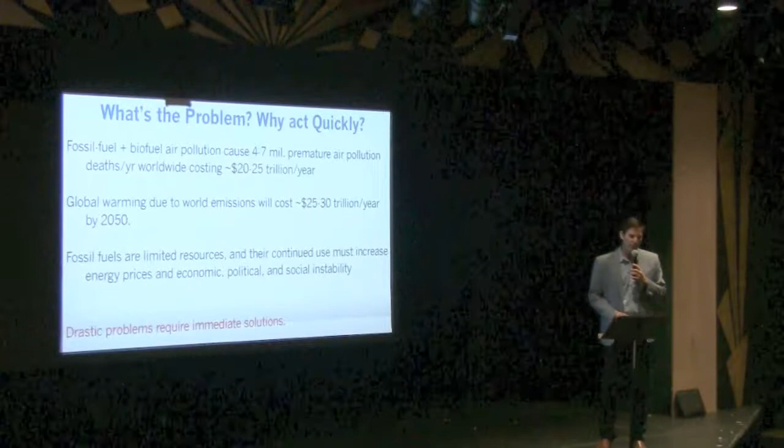In the U.S., it's about 65,000 premature deaths, and in California, around 13,000 premature deaths per year. So this is a significant problem that occurs today, and we'd like to eliminate it.

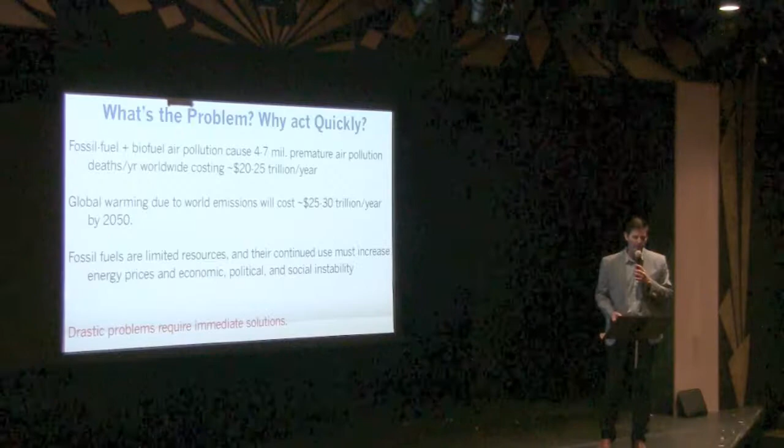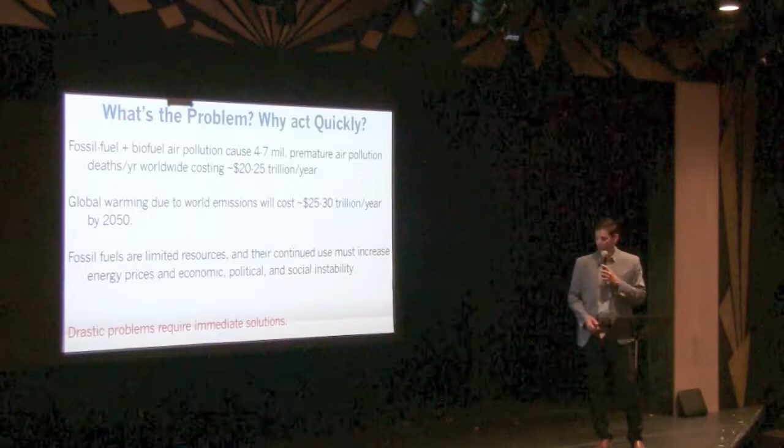Global warming, of course, I don't have to convince you about either, and it's expected to cost $25 to $30 trillion per year by 2050. But fossil fuels are also limited resources, and even if you didn't care about climate or the environment, you'd still care about the fact that costs are going to go up with limited resources that decline over time, and eventually that can lead to social, political, and economic instability. So these are all drastic problems that require immediate and drastic solutions.

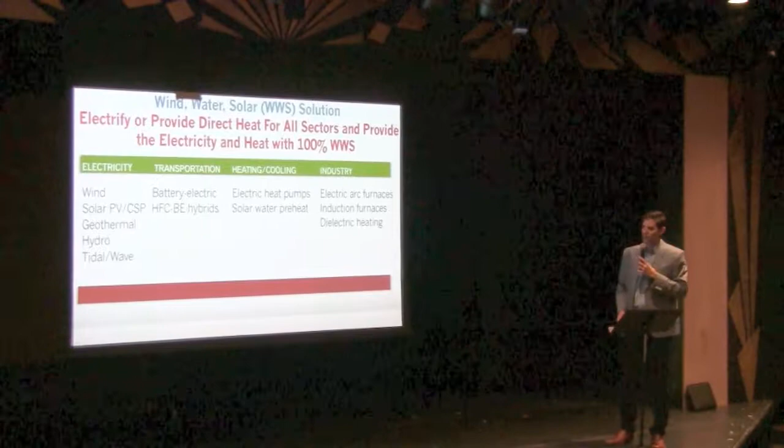Our solution has been to electrify or provide direct heat for everything, in all energy sectors, not just electricity, and provide that heat or electricity with clean renewable energy, namely wind, water, and solar power. For example, in transportation, we transition everything to battery electric vehicles, or for long distances, hydrogen fuel cell battery electric hybrids. I'll show you examples of that.

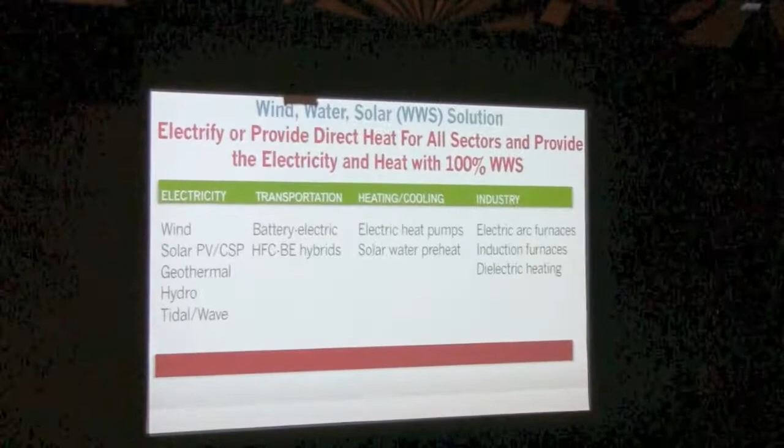For heating and cooling, we use heat pumps for pretty much everything, which run on electricity. They don't create heat, they move heat, and they also move cold, which makes them much more efficient. Some solar hot water preheating is also used. For industry, we use existing technologies like electric arc furnaces, dielectric heaters, and induction furnaces.

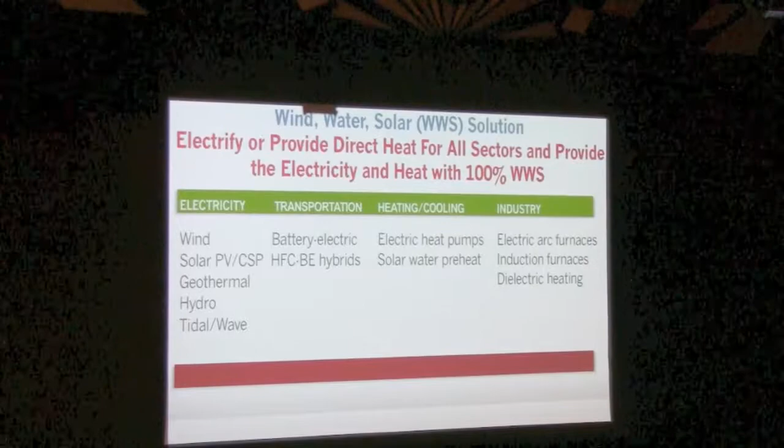Then we provide the electricity with either onshore or offshore wind, solar photovoltaics on rooftops or in power plants, concentrated solar power, geothermal power, existing hydroelectric—we're not proposing to build new dams—or tidal and wave power. Just to give you some examples, the hardest thing to transition will be aircraft, but there has been some progress so far.

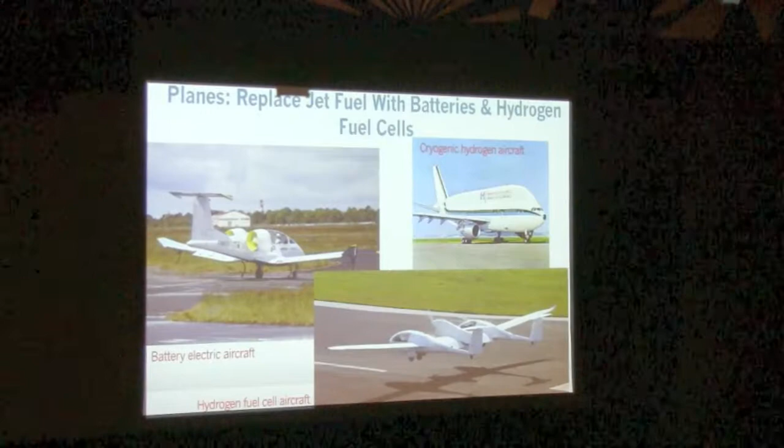On the left we have a battery electric aircraft, hydrogen fuel cell aircraft on the right here that goes 1,500 kilometers, seats 4 people. And the idea is that all commercial aircraft up to 1,500 kilometers will be electric. There are several companies like Ampaire and others working on this right now.

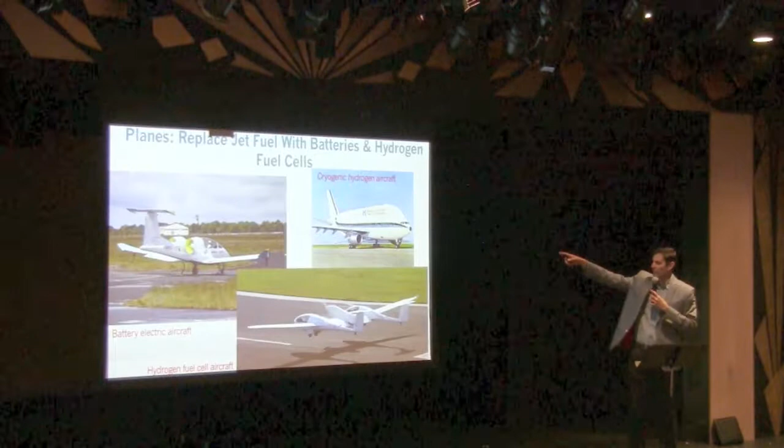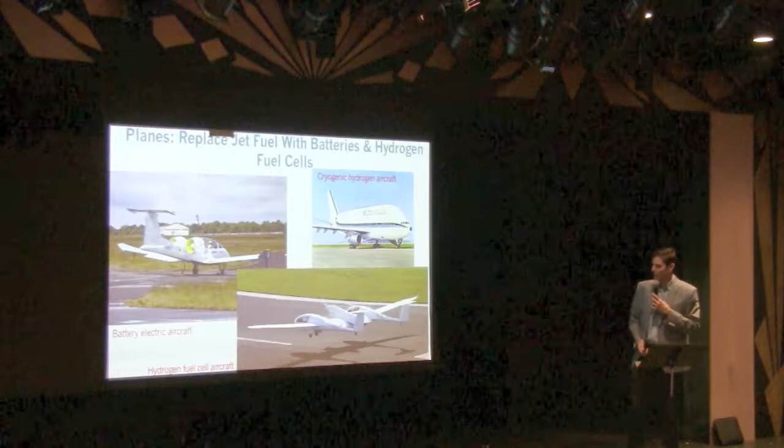For longer distance, it would be a hydrogen fuel cell electric hybrid. For hydrogen, you need bigger tanks because it has much less energy density than jet fuel, but it weighs a lot less. So you might have an aircraft that looks like this, a cryogenic hydrogen aircraft, with a larger fuselage, but it actually weighs less than current aircraft. So the overall drag is the same, the efficiency is pretty much the same. The space shuttle was propelled into space on hydrogen, as have most rockets over the last 30 years, so it's an existing technology that just needs to be turned into commercial aircraft for long distances.

So this is the hardest thing. We expect this by 2035 to 2040 to get this transition. This is why we don't have 100% by 2030, because it won't be possible to get these aircraft and long-distance ships all converted by then. But by 2035 to 40, we do hope so.

For industrial heat, these are existing electric devices like arc furnaces and induction furnaces. Right now, what you do is burn coal or fuel oil to get this high temperature heat. These can be replaced with electric alternatives, with the electricity provided by clean renewable energy.

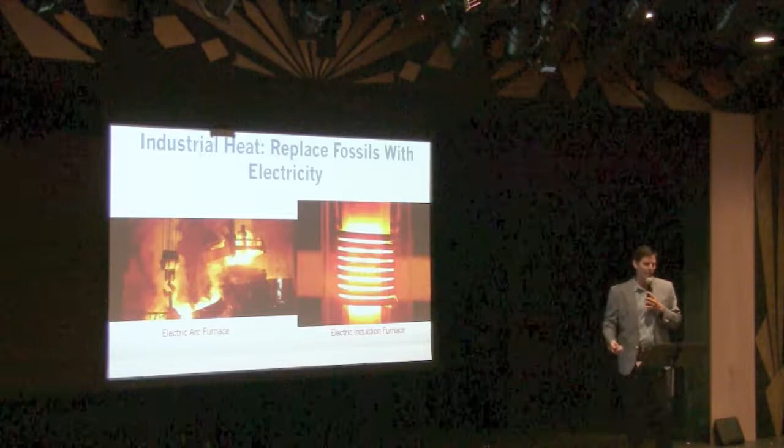The other game changers that are already occurring are floating offshore wind and floating solar. There are places around the world that are very densely populated, take Singapore for example, or even Gibraltar, where the population is so high in a small area that you can't put a lot of wind turbines on shore, or even near enough shore. So you want things like floating offshore wind, which really opens up pretty much the whole world to wind power.

It exists. There are now existing commercial floating offshore wind farms that not only have been built but are being commercialized around the world. And solar as well, there are now lots of floating offshore solar farms. This allows places that are land constrained, say Japan for example, to really build their energy offshore.

In the case of wind, you don't even have to see it. It'll be far enough away that people won't even complain about the visual because you can't see it. This is a real game changer in my mind, and something that needs to be worked on even more, because the wind resources offshore are just incredible. It's the greatest unexploited resource of energy in the world, especially offshore on the east coast of the U.S., and also the west coast, although it's deeper there.

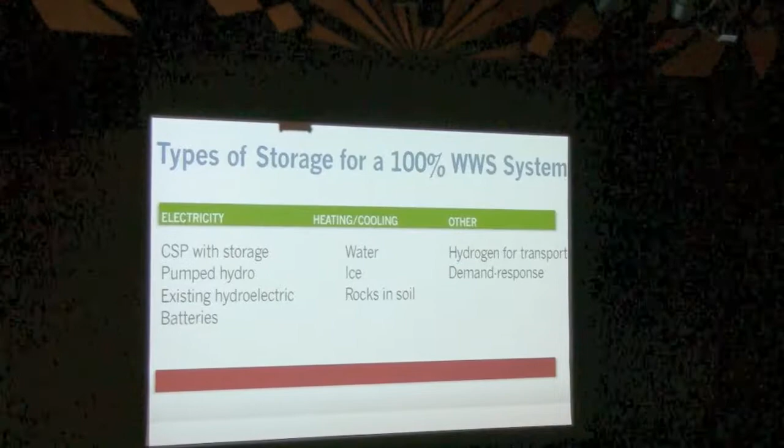For electricity, we use concentrated solar power, which is associated with storage for the most part. There's pumped hydroelectric power, where you have two reservoirs, an upper and a lower one. When you have excess electricity, you pump water up a hill; when you need the electricity, you let it drain down the hill and run through a turbine. Existing hydroelectric dams are basically big batteries that you can turn on and off to some degree, within seconds, to generate electricity. And then there are batteries themselves. These are the main types of battery storage for electricity, though there are others.

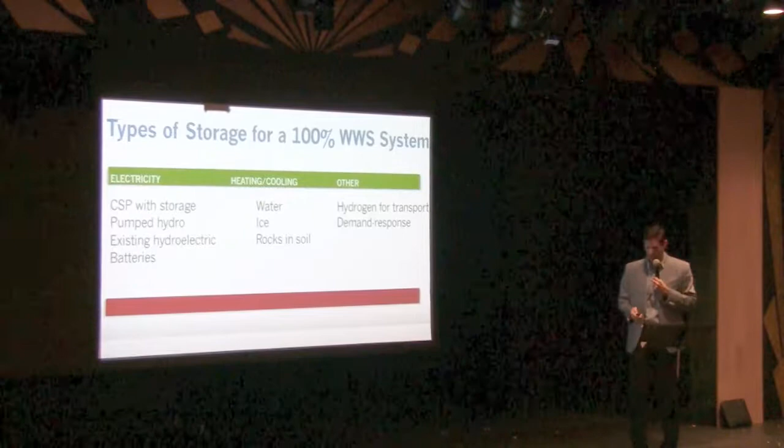For heating and cooling, you can store hot and cold in water. I'll show you some examples in a minute. And in ice, you can store cold.

You can store heat in rocks, underground, and soil. There's also cement or other materials you can store heat in. And hydrogen itself is really a form of storage of energy.

We'll use hydrogen pretty much only for transportation, for the examples I showed you with planes and long-distance ships, trucks and trains. Because for short distance, it's much more efficient to use a battery electric vehicle than a hydrogen fuel cell vehicle, using 1/3 the energy.

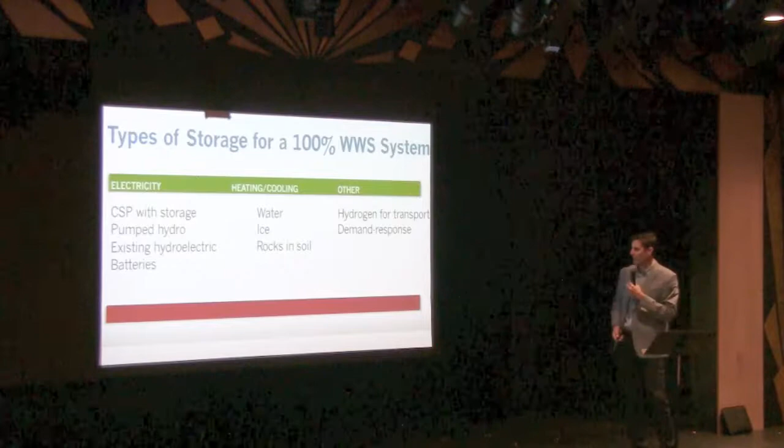A hydrogen fuel cell vehicle is more efficient than a gasoline or diesel vehicle, but much less efficient than an electric vehicle. So you really only use hydrogen for long distance, because that's where batteries become more difficult—you need so many more batteries that they start weighing down whatever you're moving, making them less efficient for a long-distance truck that can't stop to refuel or recharge going across the country.

Now there are long-distance and medium-distance trucks that have been built and commercialized that are just battery electric, so those are great. Tesla has one, and other companies have built them as well.

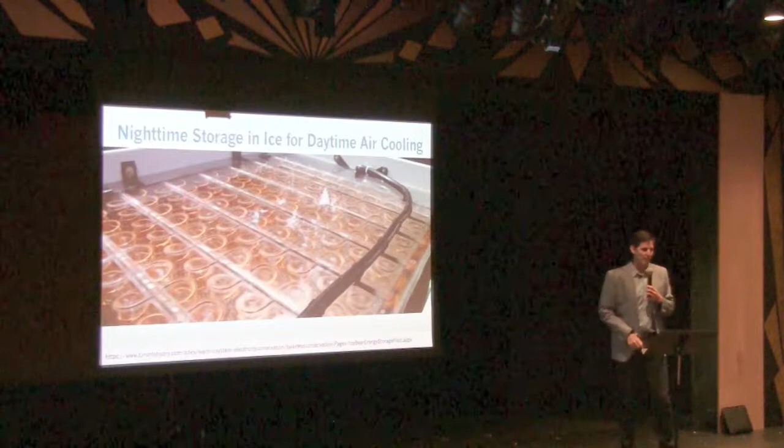Let me show you a few examples of storage options that have been around for a long time. Stanford had, between 1998 and 2015, a big ice cube under a building used for this purpose. It's not this particular ice cube, but it's similar.

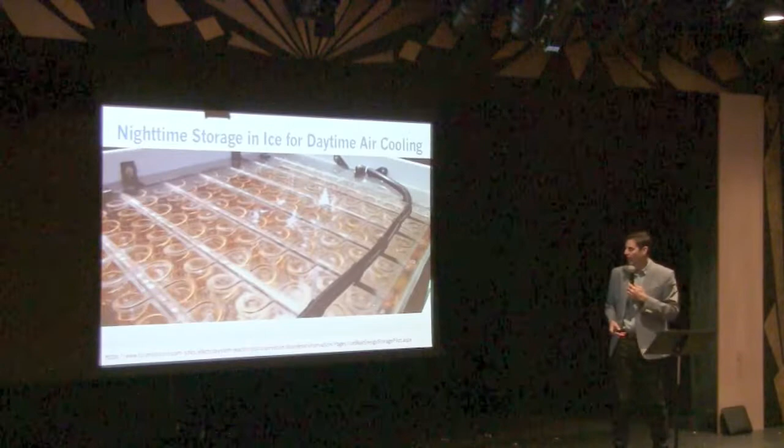There are coils in the ice, so at nighttime when electricity price is low, you use electricity to produce ice. Then during the day, instead of running air conditioning using electricity in the afternoon, you run water through the coils in the ice and send the cold water to the buildings to cool them. So this is like battery storage, because you avoid using electricity in the afternoon, especially in summertime.

But it costs 1/10 of a battery per unit energy. A battery is like $300 a kilowatt hour. This is between $30 and $40 a kilowatt hour.

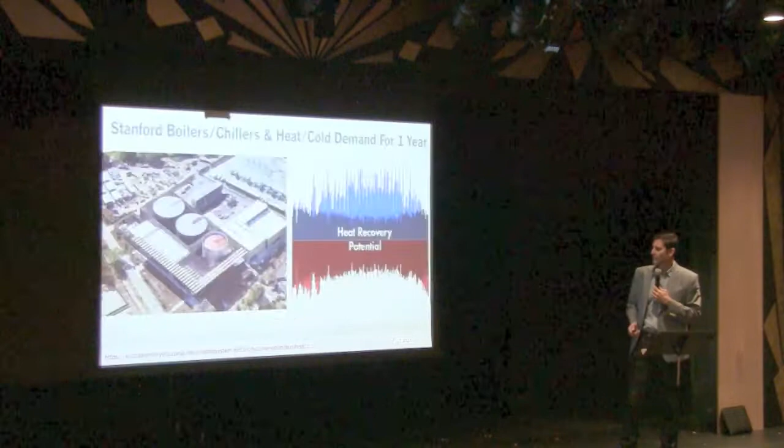So that's ice storage. Now, there was a natural gas cogeneration plant right outside my office for many years at Stanford. It provided 80% of the heat and electricity for the campus. Fortunately, it was bulldozed two years ago and replaced with two boilers and a chiller.

These two boilers and chiller, with an elaborate piping system, plus about 50 megawatts of solar that were purchased and installed down in Southern California, that Stanford bought.

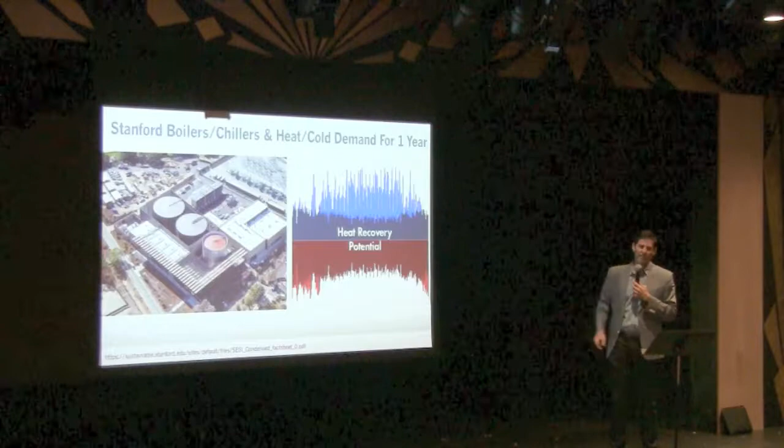This shows the heating and cooling mode during the year—that's January and that's December. The light blue is the cooling needed, which peaks in summer, and the red is the heating needed, which peaks in winter. But you'll notice that during the year, the university needs both cold and hot at the same time for different things.

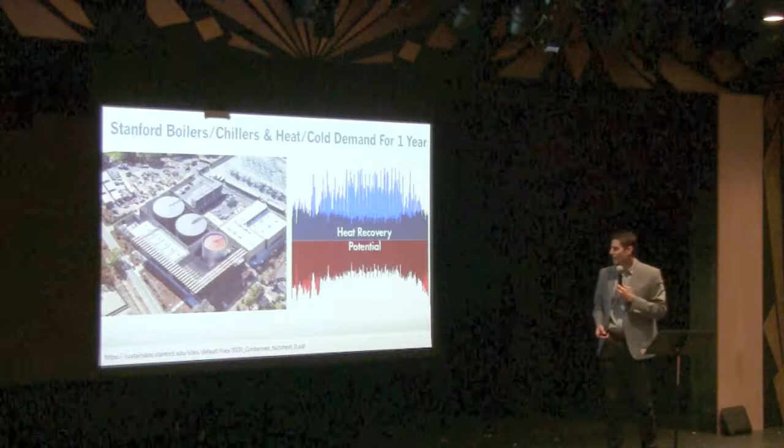Whenever you create heat, you release cold, and whenever you create cold, you release heat. So instead of wasting that excess cold or heat produced, they now capture it—that's the dark blue and dark red—and send it to water tanks: two boilers, two hot water tanks, and one cold water tank. That heat or cold is stored and then reshipped around the university, so you don't create a lot of heat or cold, you just move it around. That saves a lot of energy.

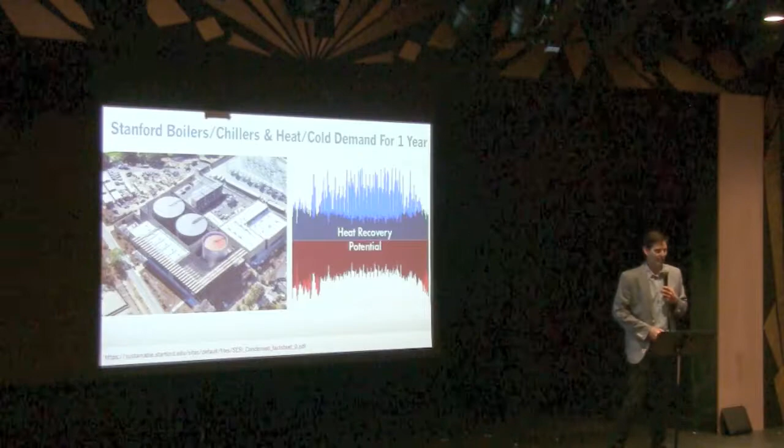So these boilers and chillers, plus the 50 megawatts of solar, replaced 80% of the carbon dioxide emissions from the university. They still get some electricity from the grid, but the grid is cleaning up as well, especially if SB 100 goes through. So this is a great thing—there's no longer a big gas cogen plant right outside my window. Instead, they just put up a huge building to replace it.

So this is another innovative technology that's been around for a while: rocks. So you see the rocks?

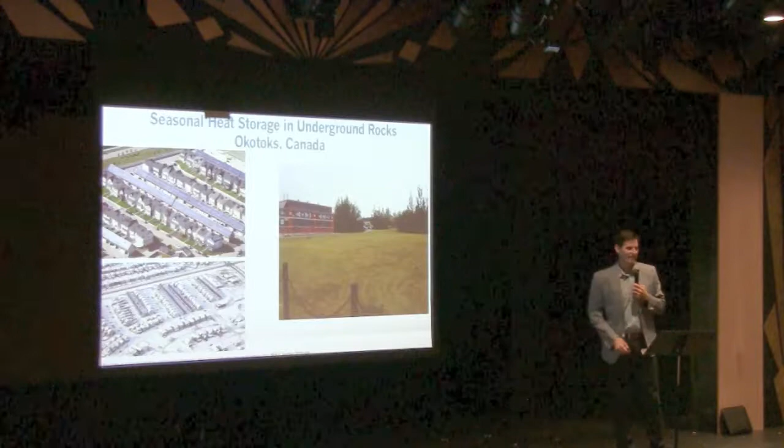No, they're buried under the grass. So you don't even see the storage technology because it's buried under a play field that kids play on. This is a town in Okotoks, Canada, 1 hour south of Calgary.

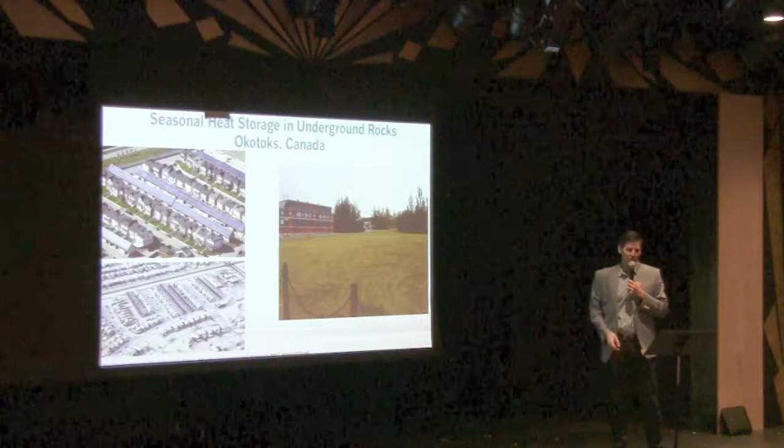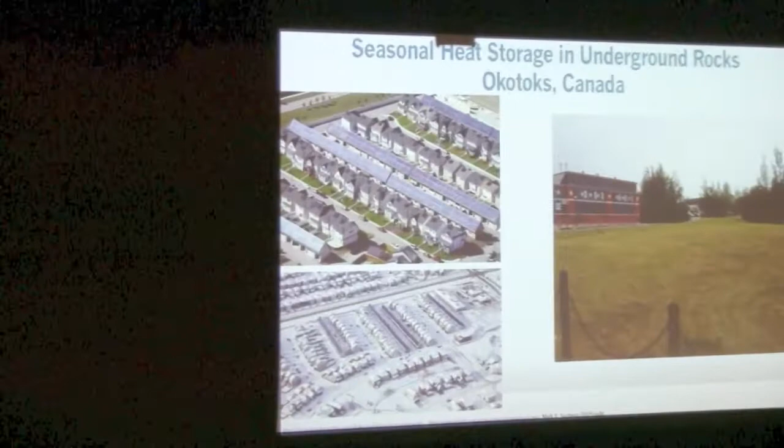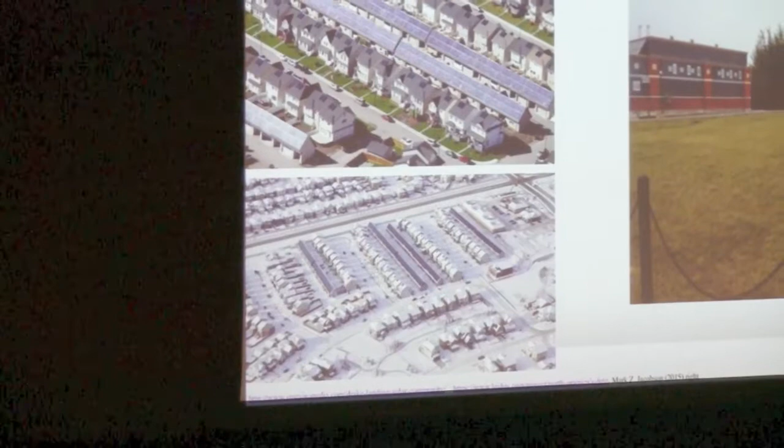There are 52 homes built in 2004 and 2005, and on the garages they have solar collectors put on the roofs. These collectors have a glycol solution, so in the summer, when the days are very long, the collectors heat up, the glycol solution gets heated, and gets piped to a building where the pipe passes by a water pipe to heat the water. The water gets piped underground in a closed loop, so there's no water release, it just exchanges its heat to the rocks, heating them to 80 degrees Celsius or more.

This field had been excavated, lined with insulation, then filled with rocks and pipes and filled in. The heat is stored until wintertime when snow is on the ground, and the whole system is run in reverse to provide 100% of the heating for 52 homes. Whereas a battery costs $300 a kilowatt hour, this storage system costs less than $1 a kilowatt hour.

This is also called a form of district heating. Denmark and many European countries have district heating everywhere, but not with rocks usually. Denmark has 60% of all heat provided by district heating, but they have centralized water heaters like in the last slide I showed, and the water is just piped to different buildings and used for building heat. They also have a separate pipe for domestic hot water.

So this is something that can be done on a large scale, it just hasn't been done because nobody's thought to do it, since we've had so many fossil fuels that can heat us for many years. So it's time to change.

Before I get onto our big plans, I still want to show you some more things. I built a new home that I moved into last year, and there's no gas on the property, it's all electric. I just want to show you what I did, because it can be done and it's cheap. I'll show you first and tell you why it's cheap.

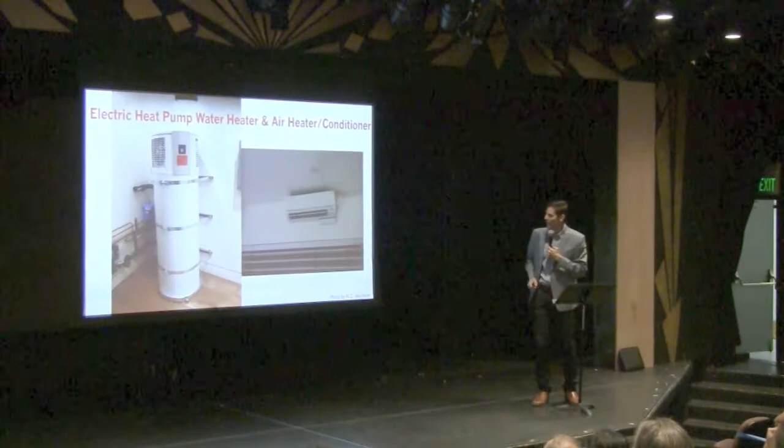Everything's electric. The water heater is an air source heat pump water heater. Instead of creating heat to heat the water, the heat pump extracts heat from the room it's in, which is a mechanical room. There are vents, so the heat is extracted and heats the water, then the cold is spit out through the vent, so the room chills down a little, which in summertime is great because you can open the door and the cool spreads throughout the house as a source of additional air conditioning.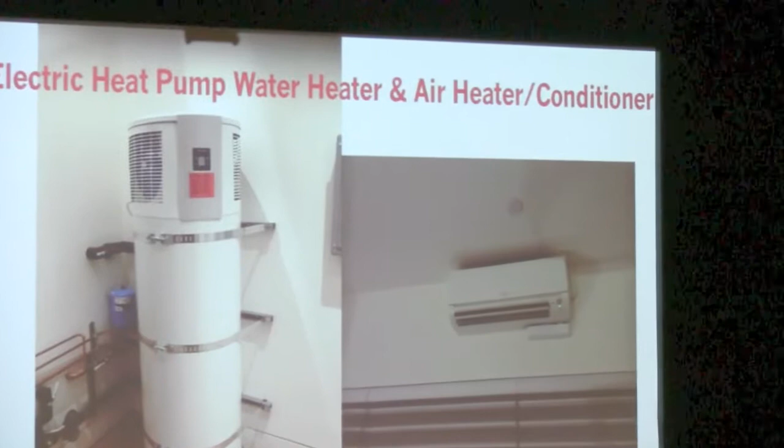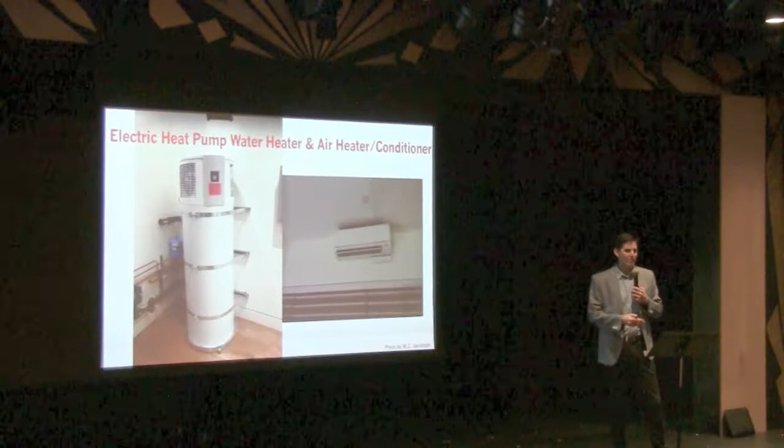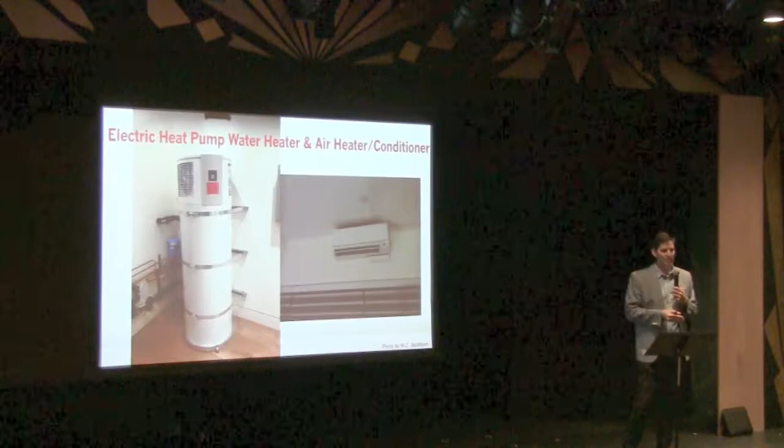This uses 1/4 the energy of an electric resistance water heater, or 1/4 the energy of a gas water heater, to do the exact same thing, because it uses a heat pump. A heat pump does not create heat, it just moves heat. For every 1 unit of electricity, you move 4 units of heat. With a gas heater, 1 unit of gas produces 1 unit of heat. Same thing with an electric resistance heater, 1 unit of electricity creates 1 unit of heat for a water heater. A heat pump moves 4 units of heat and expels 4 units of cold. Now that's for the water heater.

For house heating and air conditioning, we have these other heat pumps, called ductless mini-split heat pump air conditioners and heaters. They're mini-split because there are several units throughout the house, each one basically a localized heater or cooler. The heat is extracted from the air outside the house, not from the room, or when the air conditioner is running, the cold is extracted from the outside air and sent inside. It's ductless because instead of big ducts like a gas heater uses, where there's a lot of efficiency losses, there are no ducts here. The heat is generated right in the unit, and through heat exchanging, a copper pipe with coolant transfers it.

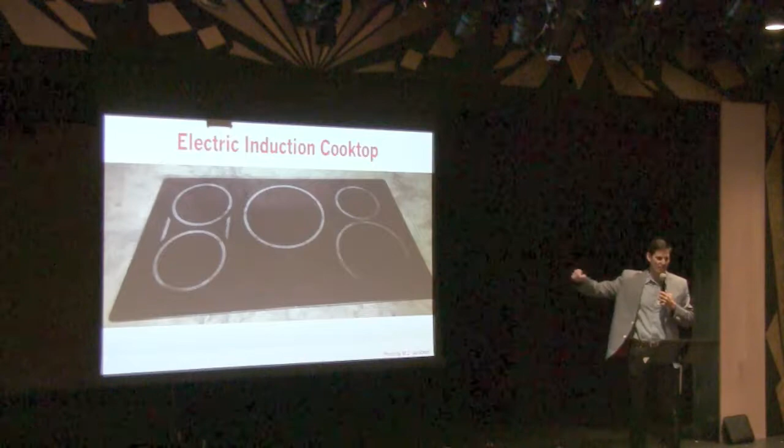And plus you're using gas, which comes from somewhere, and you have to drill 20,000 wells in the U.S. every year to get gas. There are 1.7 million active oil and gas wells in the U.S., 2.3 million inactive ones, and 20,000 new ones every year. So if you keep burning gas, you're going to have to keep drilling these holes everywhere, taking up 1 to 2% of the land area in the United States.

Then for electricity, there's solar on the roof, enough to power the whole house 2 times over, it turns out. I designed it because I thought it would be just enough to meet all the demands, including electric cars. But it turns out everything is so efficient that I'm actually using half the electricity I thought I would use.

I'm able to sell back the electricity to Silicon Valley Clean Energy, who took over for PG&E's generation, and they will pay up to 25 cents a kilowatt hour for what you generate, whereas PG&E would only pay up to 2 cents a kilowatt hour for the excess over what you use. If you generate more than you use during the year, at the end of the year, the true-up with PG&E was down to 2 cents a kilowatt hour. Silicon Valley Clean Energy, which is a community choice, pays up to the actual rate you'd pay for the generation portion, which is 25 cents a kilowatt hour. So they'll pay up to a maximum of $5,000 a year for the electricity that you produce over what you use.

And in addition to not having to pay any more electricity bill, that's really why this thing is going to pay itself off really quickly.

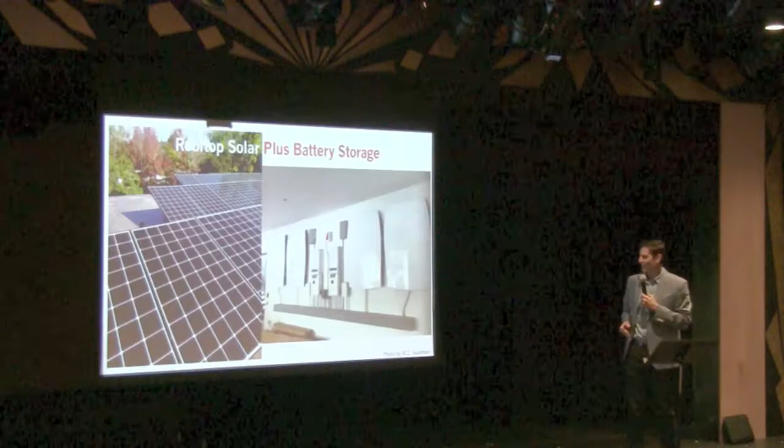So there are 4 Tesla batteries, but PG&E only allowed me to turn on 2. So everything I showed you is with 2 batteries, because they came up with some esoteric rule that if you have more than 10 kilowatts of storage on your property, they have to use some other rule book where they need to measure what's going in from the solar to the inverter, as well as what's going to the inverter from the battery. And they didn't have the ability or technology to measure the solar. So as a result, they said because they can't measure above 10 kilowatts, you can only have less than 10 kilowatts - they don't care if it's less. So I shut off 2 batteries.

But anyway, it turns out it's not that bad. When these other batteries run out, then we'll just turn those on.

There are 2 electric cars that get charged maybe once a week, or sometimes once every 2 weeks. Everything is electric in this house. I wanted to show you 1 week of data - this was in the summer, so it's maybe not representative of the year, but it's actually representative of about 2/3 of the year.

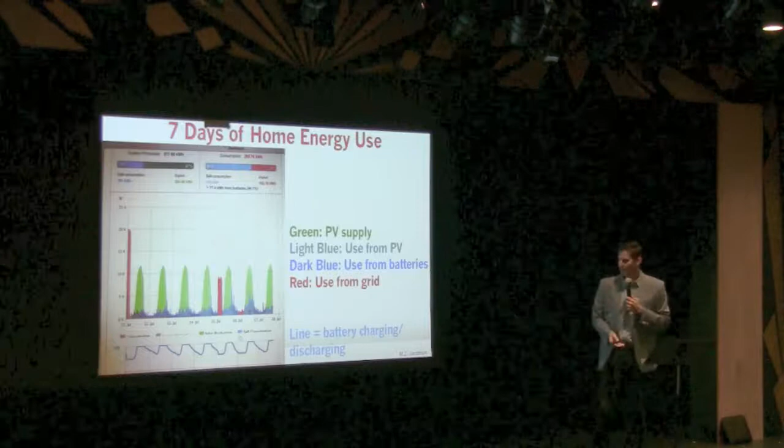The green is the photovoltaic PV supply of electricity during 7 days. The light blue, which occurs during the day mostly, is home electricity use for everything I'm using from the solar directly, because the order of operation is the solar is used first to run your home stuff. If there's extra solar, that's used to fill the battery. If there's still extra, that goes back to the grid, and they pay you for that electricity. Then the battery only turns on when the solar shuts off, or there's not enough solar.

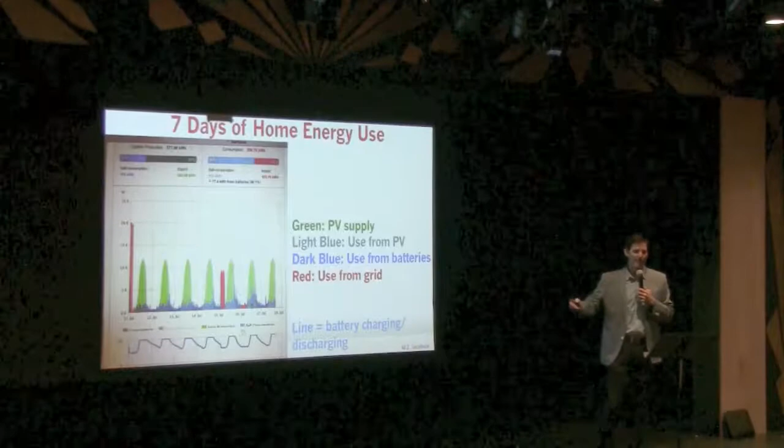So every day, the battery only turns on basically at nighttime, and then the battery drains completely. At night, if I need more electricity than what's in the battery, the grid comes back and I use grid electricity for that. So the dark blue is from batteries, which you can see is at night, and the red is from the grid. The only time I really use the red from the grid is when I'm charging the cars.

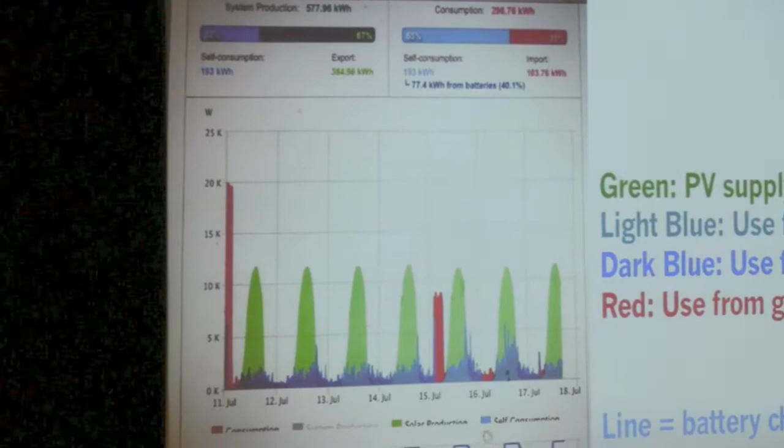You can see the 20 kilowatts from the Model S, and the other one, the 10 kilowatts almost from the Roadster. There's not enough storage in those 2 batteries, and the discharge rate isn't large enough to actually charge the cars, so you need it from the grid.

Then down there's the battery - you can see it's charging, discharging, charging, discharging. It's going down to 50%, well that's because the other 2 batteries are counted, even though they're just sitting there, as 50%. So 50% is the minimum. It's charging every morning and then discharging at night, charging every morning.

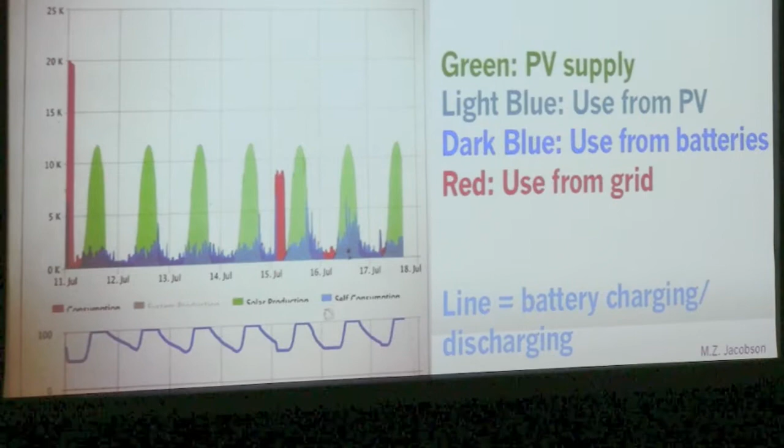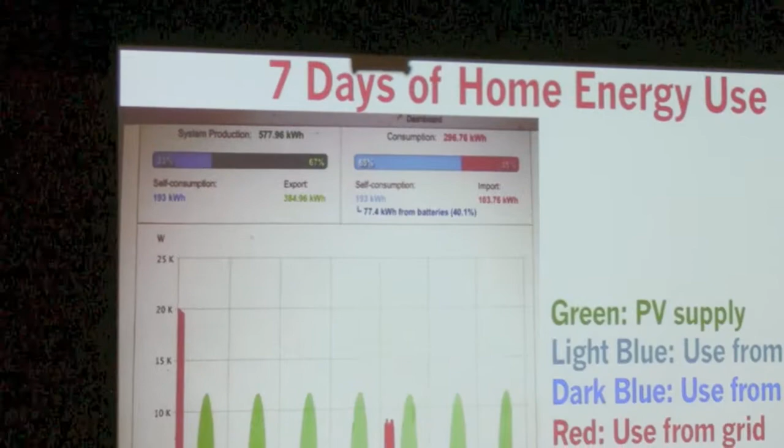But the real key numbers are at the top. It produced 580 kilowatt hours during that week of solar. 384 kilowatt hours were exported back to the grid, 103 were imported from the grid, so there was a net export of 280 kilowatt hours out of 576 kilowatt hours. So that means I sent 50% of the electricity back to the grid.

So even if charging the car, running everything in this house, they're paying for that extra electricity. Now I'm almost, in April I'll be done with the full year, but so far I'm just over the entire, almost 10 months. It's at about, I've sent about 40 to 50% of the electricity back to the grid over those 10 months.

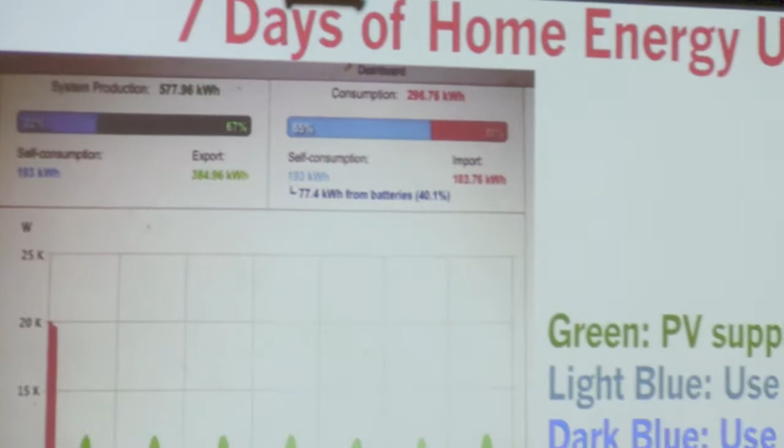Okay, so next question is, can the world transition to 100% clean renewable energy using these technologies that we're talking about? So we're going to look first at roadmaps we developed for each of 139 countries.

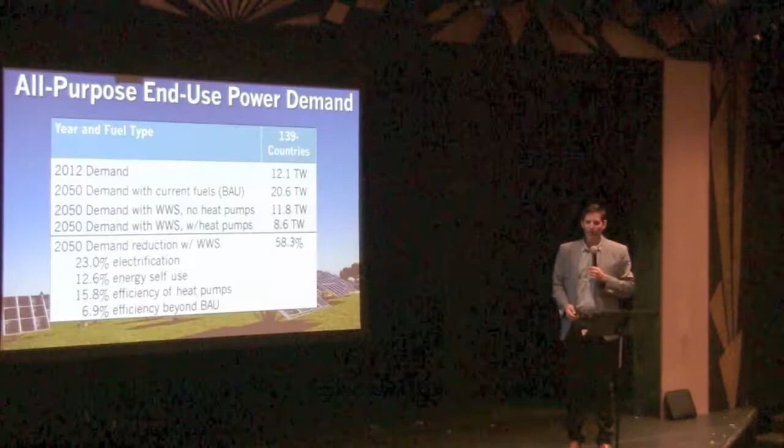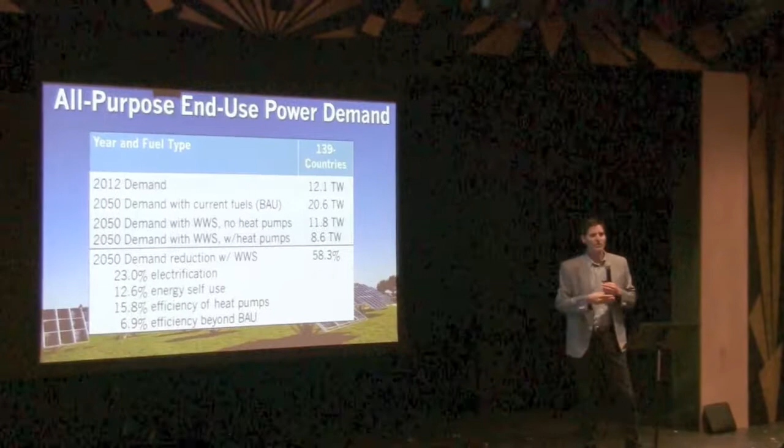So what we did is we started with, in this case 2012, electricity energy use for all purposes. So that's electricity, transportation, heating, cooling, industry, agriculture, forestry, fishing. And we projected that energy use to 2050, accounting for population growth and reductions in energy use due to efficiency.

Now it turns out if you then electrify all energy sectors and provide that electricity with clean renewable energy, your power demand will go down to 11.8 terawatts without any heat pumps. And I'll explain why in a sec. But if you use heat pumps, it'll go down to 8.6 terawatts, or 58%. So just by transitioning your energy, hardly even changing your habits, not doing anything except transitioning your energy infrastructure, you can reduce power demand almost 60%.

I mean, it's incredible. And so here's how that breaks down. 23% is due to the efficiency of electricity over combustion. I'll explain that in a sec. 12.6% is due to the fact that that's how much energy is used to mine, transport, and refine fossil fuels worldwide. So when you have wind turbines and solar panels, the energy comes right to the turbine or panel, so you no longer need to search for the energy. So you save 13% right there.

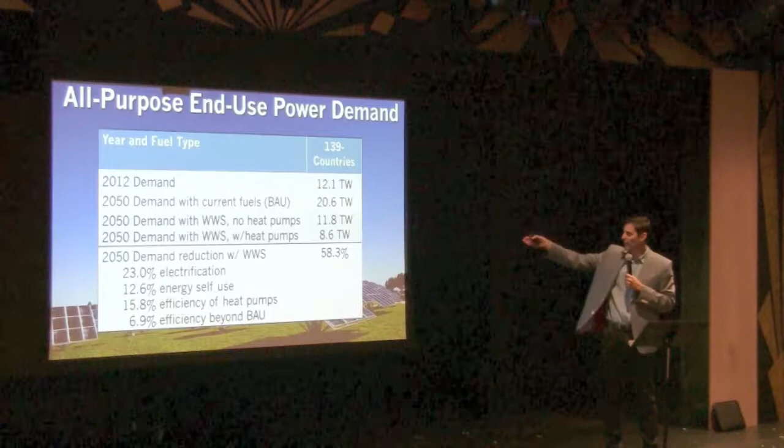So the next question is, well, the example I'm going to show you, I'm going to use the 11.8 terawatts. So we did cases, eventually we did cases for several scenarios, but I'll show you some results for the 11.8 terawatt scenario. So this is how many devices you need to power the whole world for all purposes to get your 11.8 terawatts of total energy among all 139 countries.

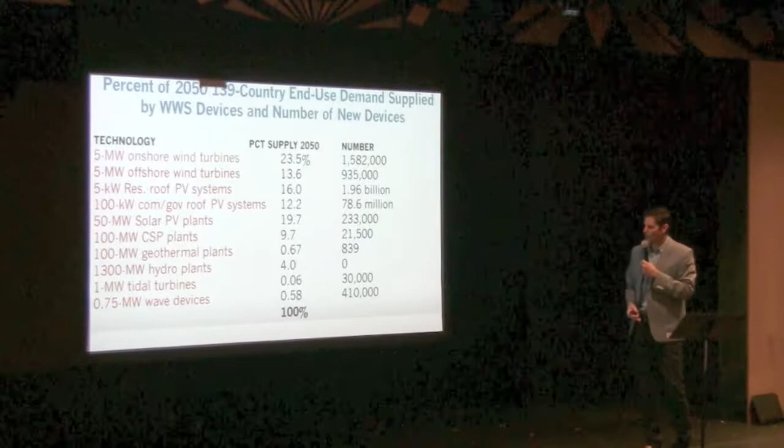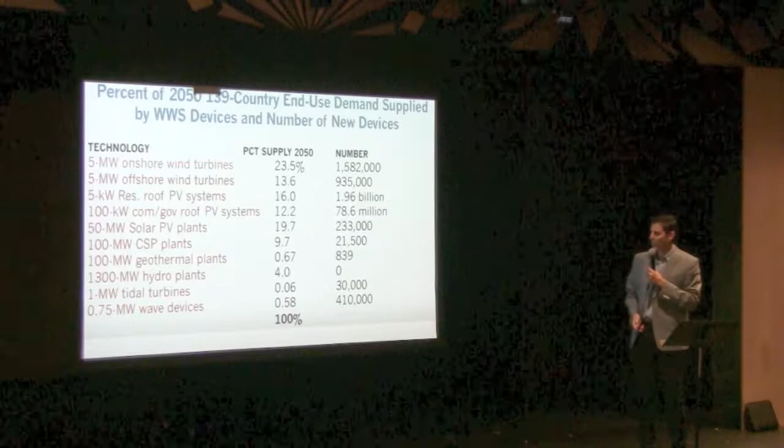It would be 23.5% onshore wind, 14% offshore wind, 16% residential rooftop photovoltaics, 12% commercial government PV systems, 20% solar PV power plants, 10% CSP power plants, 1% geothermal, 4% hydro, and then less than 1% tidal and wave. So you can see the numbers of new devices we need, like 1.6 million onshore wind turbines, almost 1 million offshore wind turbines, etc. Zero new hydroelectric plants, because these are all existing hydro.

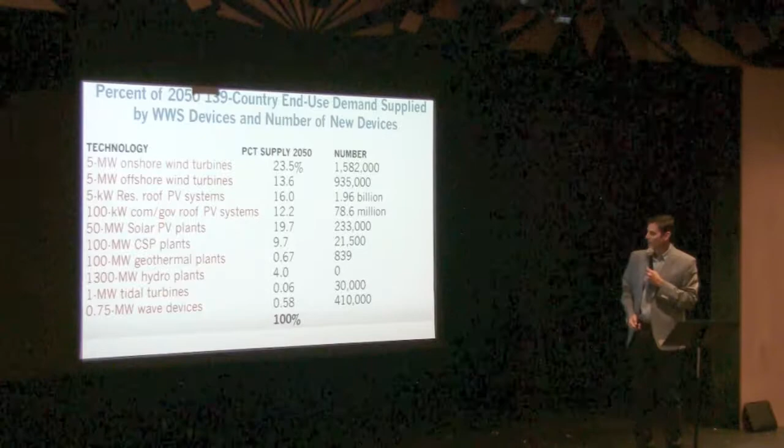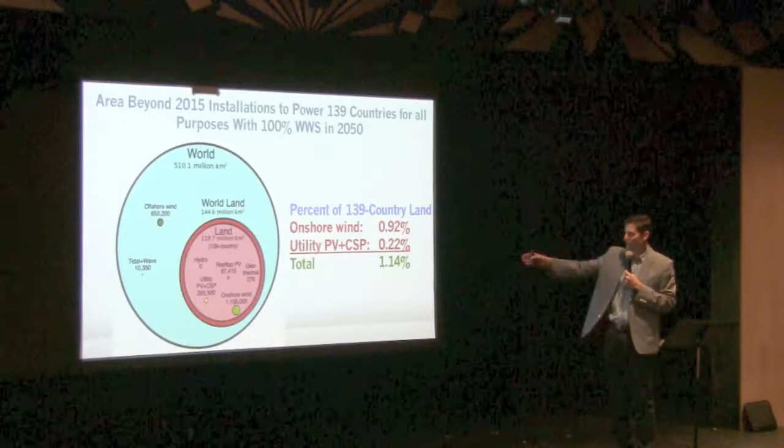Anyway, so how much land would that take? This shows a map, kind of an infographic of the land areas. PV on rooftops doesn't take up new land, so we don't count that as new land. There's no new hydro, and geothermal is trivial. So the only real new land we need is for utility scale photovoltaics and concentrated solar power, which takes 0.22% of the world's land area.

Then onshore wind, which is almost all spacing in between wind turbines that can be used for multiple purposes, such as ranching, farmland, rangeland, open space. That would be about 0.92% of the world's land. So even counting that, you're not taking that out of production because it's used for multiple purposes. But even counting that, it's 1.14% of the world's land area.

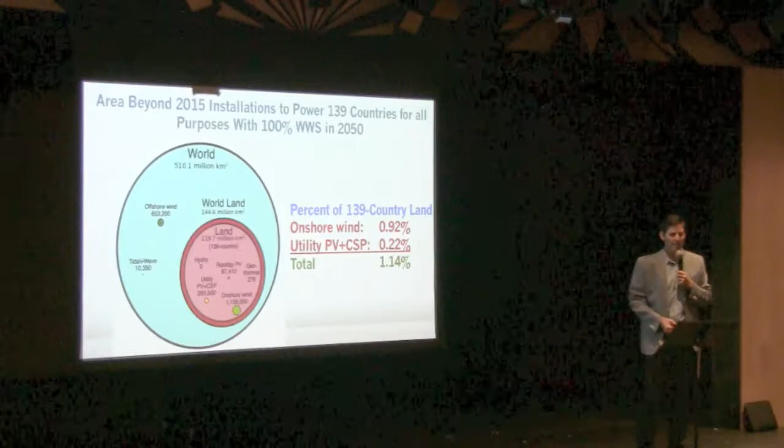The rest is offshore. So just to put that in perspective, as I mentioned, 1 to 2% of US land is used just for oil and gas mining and drilling, not even accounting for coal mining, pipelines, refineries, and gas stations. So we're going to use less land under this system than with a fossil fuel system.

Okay, so next question is, can you keep the grid stable with 100% clean renewable energy? We just came out with a paper last week that examined this issue for all 139 countries. We ran 3 different storage scenarios. We'll call them cases A, B, and C.

So case A, we had batteries, concentrated solar power with storage, heat and cold storage, no heat pumps, no added hydropower turbines to existing dams, pumped hydropower storage, and hydrogen for transportation.

In case B, it was the same, except we had no batteries in that case, no heat pumps also, but we added hydropower turbines to existing dams, no new dams, but just added turbines to existing dams to increase their peak discharge rate, and everything else is the same.

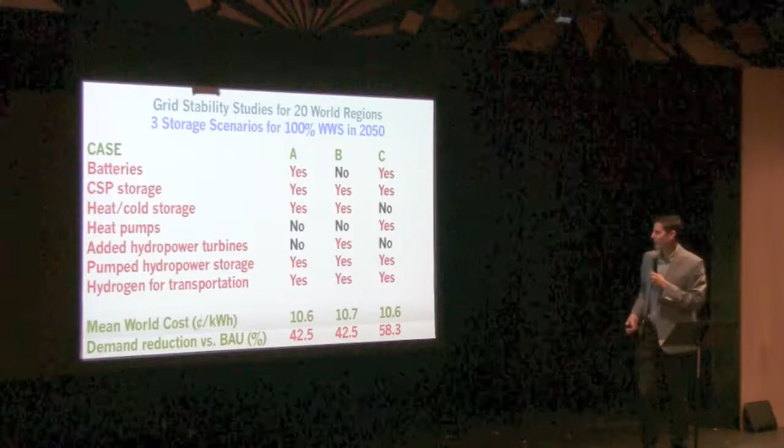The third case was with batteries, storage, concentrated solar power with storage, but no heat and cold storage at all, because we're using heat pumps in this case, just run on electricity without heat storage. We have electricity storage for the heat pumps, but there's no need for heat storage or cold storage if everything's using a heat pump. And we have no added hydropower turbines, but we have pumped hydropower storage and hydrogen transportation.

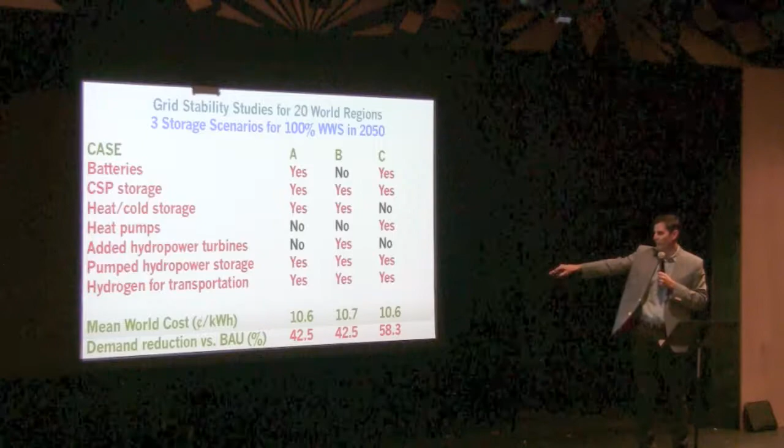Turns out that the mean cost of energy in all cases is almost the same. And the demand reduction, the first 2 cases were 42.5% before the heat pump reduction. The third case, we had 58% because we had heat pumps everywhere. So we actually used less energy in that case.

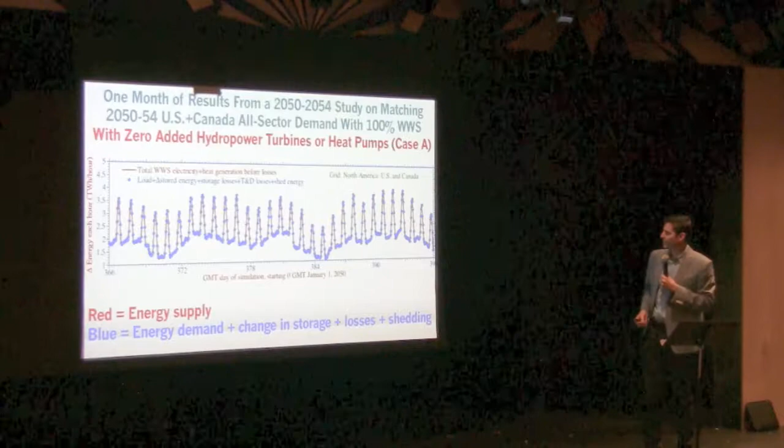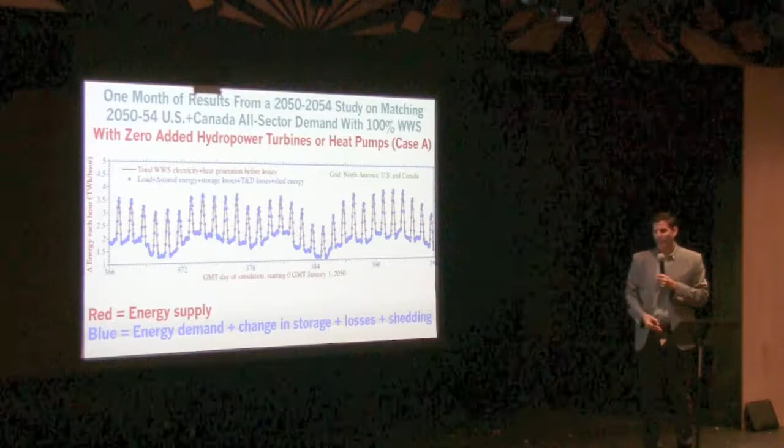So I'm going to just show you some results. This is for case A. We found stable solutions for all 20 world regions, for all cases we did, for all 3 cases. This shows 1 month of results out of 5 years. We ran 5-year simulations for each region at a 30-second resolution. We obtained the winds and solar fields from a climate model that's producing them every 30 seconds.

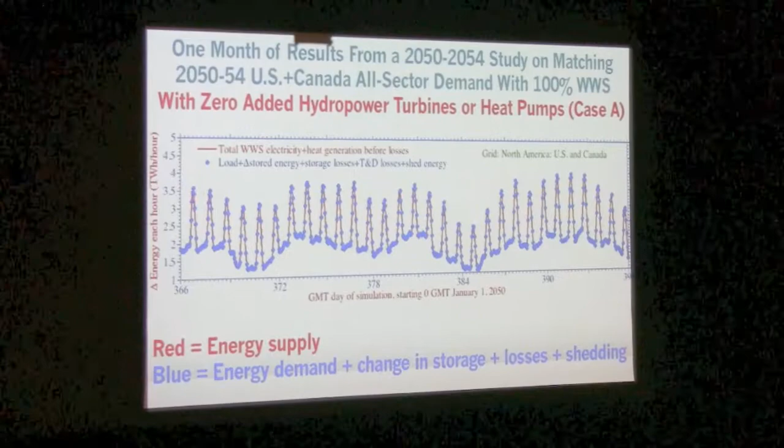The blue is energy demands plus changes in storage plus losses plus shedding of energy. The red is the energy supply. You can see in this case for North America, US and Canada anyway, the grid was stable for all 30 days, every hour, in fact every 30 seconds for 5 years.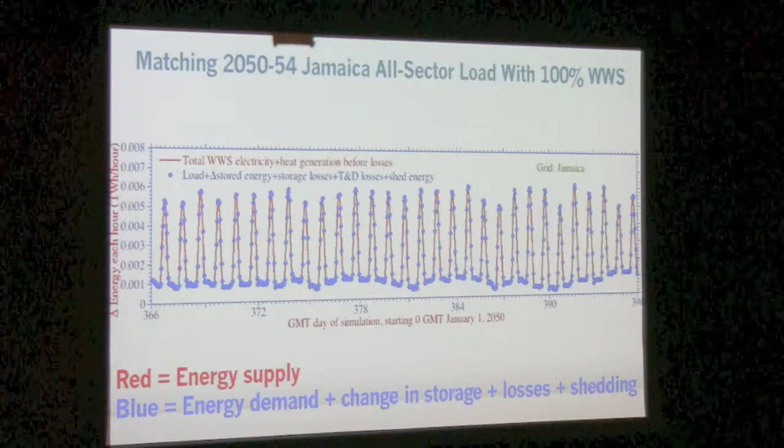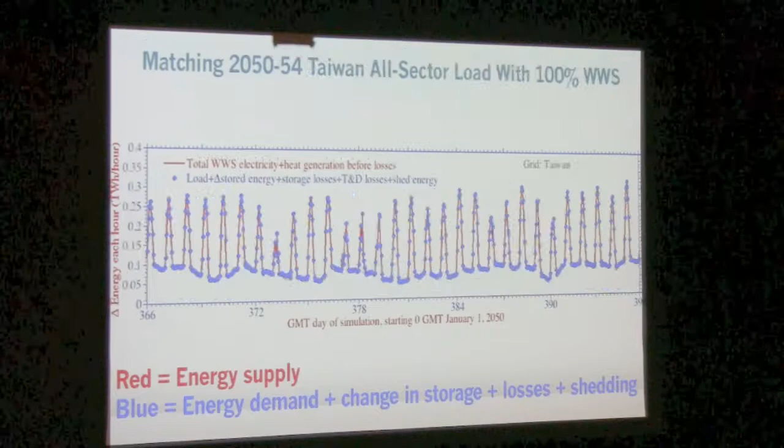I'll really quickly run through these other cases. Central America was stable, Cuba, Haiti, Dominican Republic - these are island countries, so Puerto Rico would fall into this as well, although we didn't have the data for Puerto Rico. Jamaica, South America, New Zealand, Australia, Southeast Asia, Philippines, Japan, South Korea, Taiwan, China, Hong Kong, Mongolia, North Korea, Russia, Georgia, Nepal, India, Sri Lanka, Central Asia, Middle East, Europe, Iceland, Africa. So in all 20 world regions, we found stable grids for all times, for all storage cases.

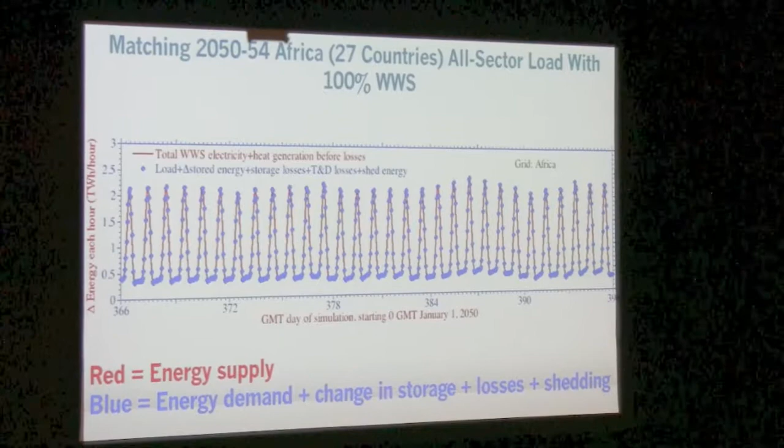So here's the cost of energy again. On the top, we're going to be showing the fossil fuel cost of energy in the electric power sector before you electrify, just because that's where we have to compare. There's no overall cost of energy for the fossil fuel sector available because every sector is different. So if we want to look at the fossil fuel sector, we have to break it down.

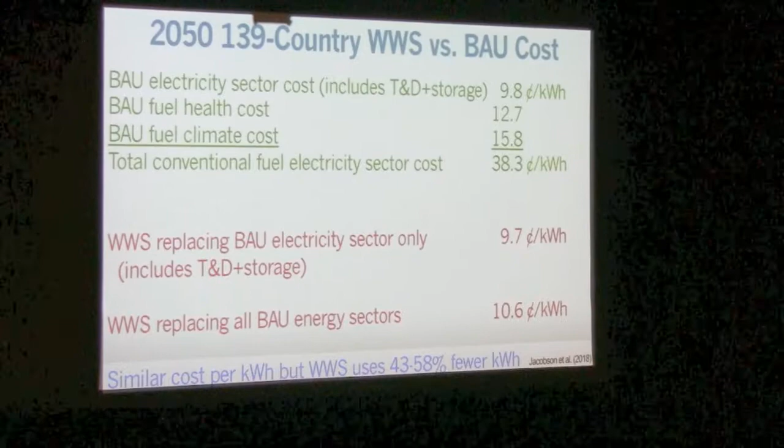If you look at the electric power sector, it's 9.8 cents a kilowatt hour in the fossil fuel for the business as usual electricity cost in 2050 with fossil fuels. But there's another 12.7 cents a kilowatt hour of health costs and 15.8 cents a kilowatt hour of climate costs. So a total of 38 cents a kilowatt hour is the social cost of energy for fossil fuels in 2050.

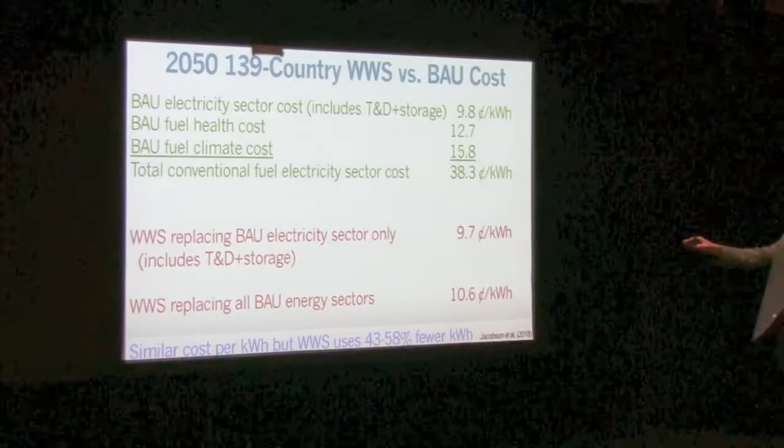If we just look at the electricity portion of the original wind, water, solar scenario, it's 9.7 cents a kilowatt hour, so it's about the same in terms of direct cost. But we have no health or climate costs—we eliminate those. So it's 1/4 the social cost.

The last number, all energy sectors with wind, water, solar, is 10.6, but there's nothing to compare in the fossil fuel case, so you really have to look at the electricity sector. The difference is, even though the direct energy cost is similar, you use 43 to 58% fewer kilowatt hours with wind, water, solar.

So the consumer's cost is half the wind, water, solar price per unit energy. In other words, if it's 1/4 of the cost per unit energy for wind, water, solar, it's 1/8 the cost out of your pocket. This is an incredible result—it's because you're using half the energy in the system, plus you eliminate all the health and climate costs, which are 3/4 of the fossil fuel cost to society.

So no matter how you slice it, it's much cheaper to go to clean renewable energy immediately, everywhere. There's no doubt about it. There's no rationale for using fossil fuels in terms of any cost.

So next time somebody says the costs are more expensive for renewables—well, wind and solar in the U.S. are the cheapest forms of electricity today, onshore wind and utility scale solar by far. The unsubsidized cost, according to Lazard 2017, compares the cost of energy. The unsubsidized cost of onshore wind is around 3 cents a kilowatt hour, and utility scale solar is now around 4 to 5 cents a kilowatt hour.

So let me speed up here. This shows what happens if we transition to clean renewable energy, from 1750 to 2100. The red dots are the CO2 measurements in the atmosphere from data, and the line underneath is a model prediction up to 2015. After that are different scenarios for different emission pathways.

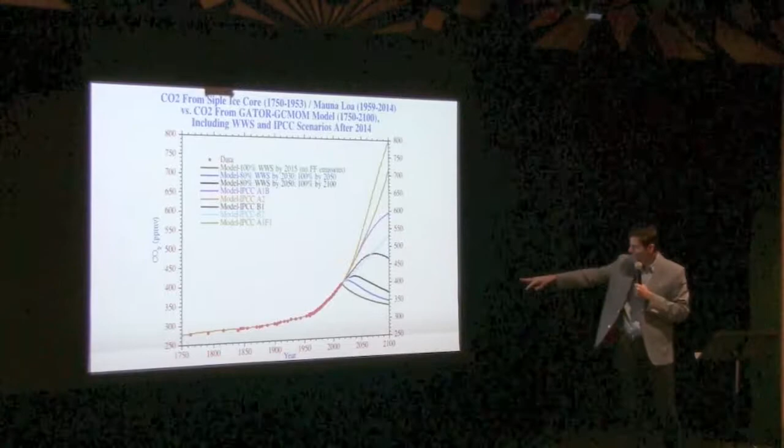The green line is if you eliminated all emissions in 2015—so that won't happen, but if it did, you'd get down to 330 parts per million of CO2 by 2100. The blue is 80% by 2030 and 100% by 2050—that's what we proposed—which gets you to 350 parts per million by 2100. The black is 80% by 2050 and 100% by 2100. The rest are IPCC scenarios that will cause lots more warming, way more than 2 degrees.

So the point is, we really need to transition rapidly, and this is what we're proposing.

Let me say something about public opinion on clean renewable energy. There was a recent opinion poll of 26,000 people in 13 countries that found 82% of the world wants 100% clean renewable energy—that was pretty uniform. Unfortunately, only 66% believe climate change is a global challenge in the same poll. So a lot more people believed in clean renewable energy than believed in climate change. It's pretty sad, but the reason people believe in renewable energy is they say renewables make countries more energy independent.

Renewables will boost economic growth, they say. So even people who didn't believe in climate change still believe there are benefits of going to renewable energy.

There was a similar poll in the US for individual states that found almost exactly the same results. Nationwide, 64% strongly supported the contention that the US should go to 100% clean renewable energy, and 19% somewhat supported it—so between the two, that's 83% either strongly or somewhat supporting 100% clean renewable energy. Only 16% were against it. It varied by state.

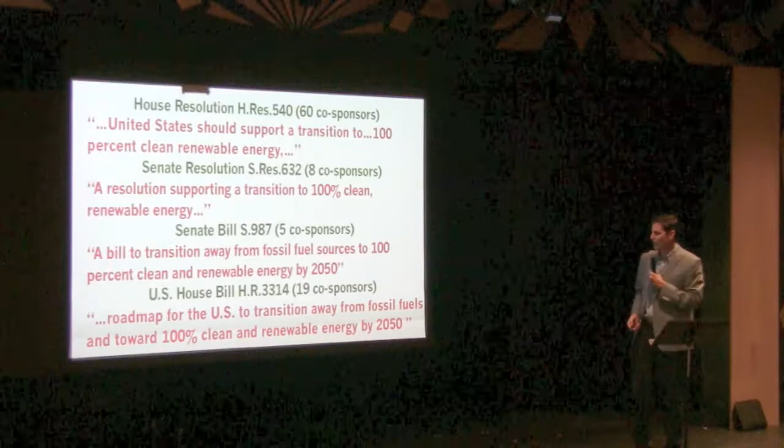They won't pass anytime soon, but they're all calling for the United States to transition to 100% clean renewable energy by 2050. And we've been working with individual states to help this transition.

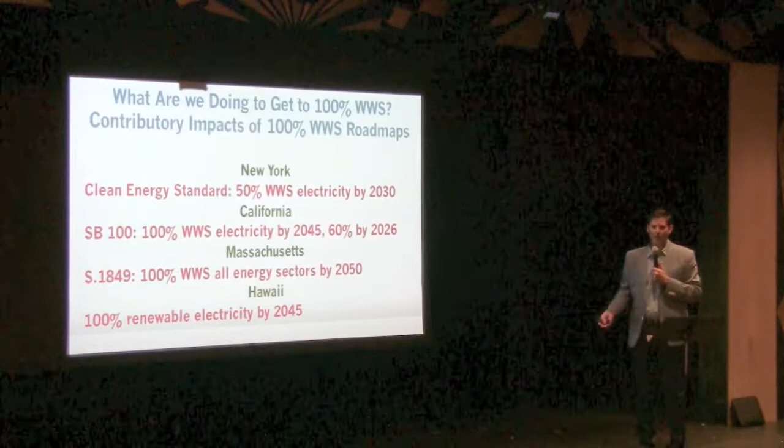In New York, we got the Clean Energy Standard, or 50% law by 2030 for the electric power sector. In California, we're hoping to get SB 100 passed, but if not, we already have the 50% by 2030 law. SB 100 would be 100% electricity by 2045, 60% by 2026, but we really need all energy sectors. We can't just do electricity alone.

Massachusetts has a proposed law to go to all energy sectors, 100% clean renewable energy by 2050, it'll be voted on this year. And Hawaii has an electricity bill that's already passed, 100% electricity by 2045.

Beyond this, there are over 123 companies that have committed to 100% clean renewable energy, including major companies of the world, and this is terrific. They've committed to having all their operations operate with 100% clean renewable energy. And to really spark this, there are 70 plus nonprofits, including Climate Reality, that are supporting this goal of 100% clean renewable energy.

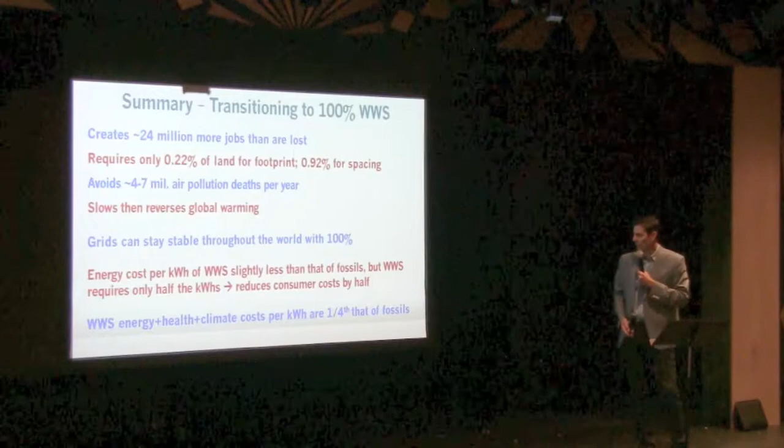We think the grids can stay stable with 100%, and the energy cost of wind, water, solar is less than fossil fuels. We require only half the kilowatt hours, but we reduce consumer costs directly by half. The wind, water, solar energy plus health plus climate costs per kilowatt hour are one quarter of those of fossil fuels.

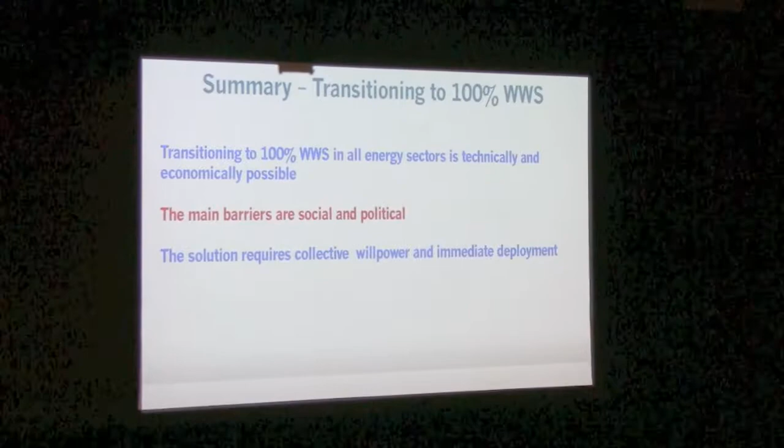Transitioning to 100% in all sectors, we think is technically and economically possible. The main barriers are social and political, not technical or economic. The solution does require collective willpower and immediate deployment.

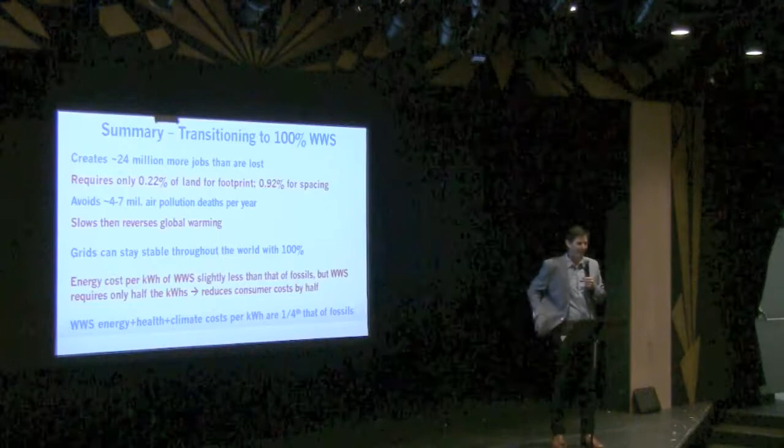Well, we try to make it as painless as possible. Obviously, we want you to change your habits and use less energy by biking more and things like that, but we're expecting people won't do that very much, so it's really about changing your energy infrastructure.

If you own a home, try to transition to all electric. Get rid of your gas, cut it off at the property line. When I built this house, I saved $7,000 just to not have the gas hookup fee. PG&E's gas hookup fee, depending on how big your system would be, is somewhere between $3,000 and $10,000, just to hook it up from the street line, because they already have it at the street line.

I asked him why it's so high, and he said every department has to take a cut. So there's no rhyme or reason for it.

So you highlighted that one of the solution pathways is getting governments to create policies that push this out, that we want 100% renewables. That's a key push for this. Does the Solutions Project see other solution pathways? I'm thinking about sectors like the corporate sector, which may have some real incentives to see some of this. Are there other solution pathways besides just government, or is that really where we're focused?

No, well, the Solutions Project itself focuses primarily on inner cities and getting people who might not normally be engaged or care about this issue, trying to inform them. So it's really trying to educate the public through different programs - it's really an education program. The Solutions Project doesn't actually lobby like Sierra Club and NRDC, who lobby for these things through government. So we really think it's partly getting information to people and trying to enable and provide help as much as possible.